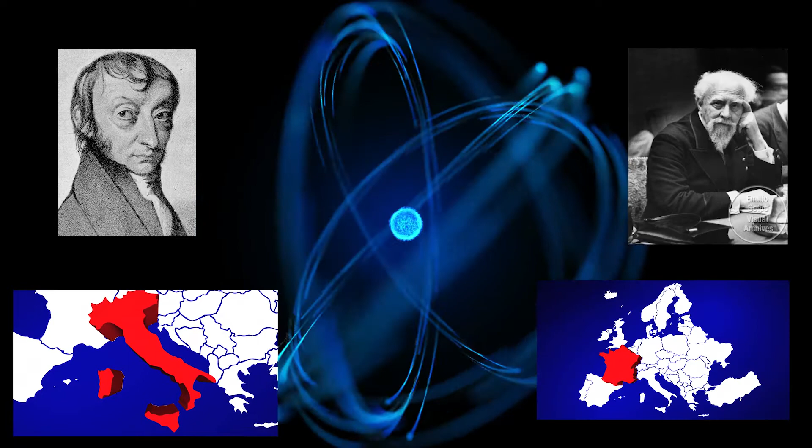According to this guy from this country, and then 100 years later, this guy from this country, in a cube of air with a dimension of 1 meter by 1 meter by 1 meter, we usually have this many air molecules near where we live.

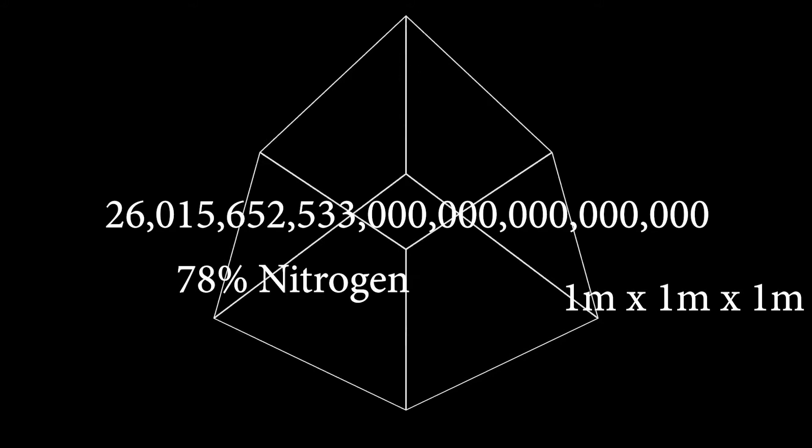78% of these are nitrogen, 21% are oxygen, and today we will follow one of those, this one. Let's give it a name, let's say Jason. And Jason is an oxygen molecule.

We don't really care about Jason's previous life as a molecule. All we need to know is Jason at the moment, and the Jason that will propel the plane later on.

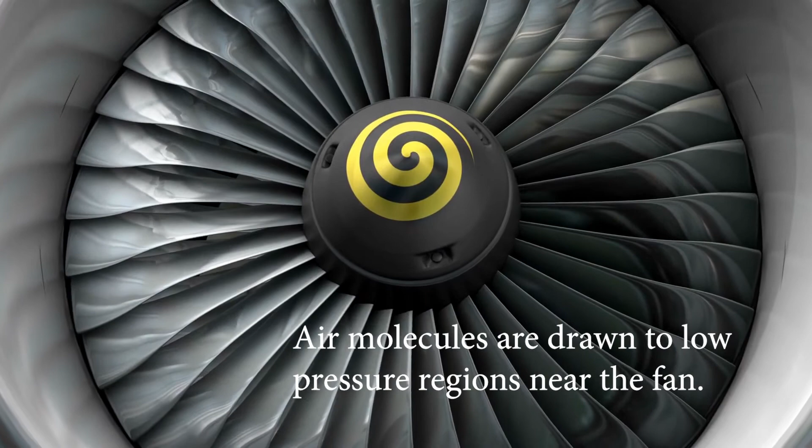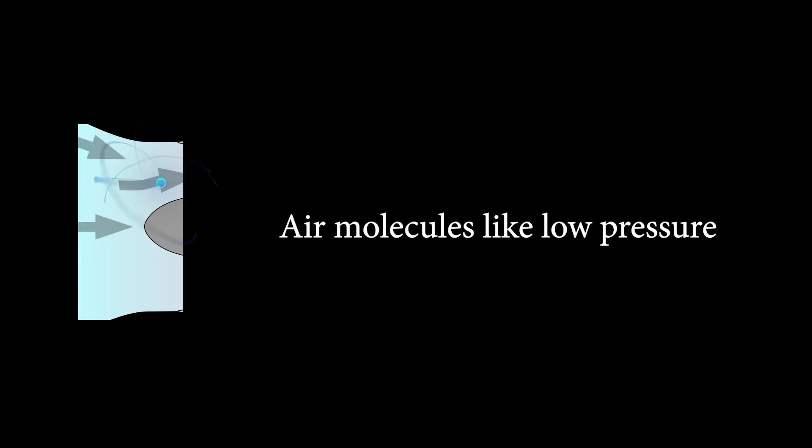The story begins and the engine's fan spins. This spin creates a pressure gradient, and Jason, the air molecule, the oxygen, is pressured to move towards the engine. So for any air molecule in the atmosphere, its tendency is always to move towards wherever the lower pressure is.

Just imagine we have two metros. One is really crowded and one is fairly quiet. Standing in a station, you have the choice to go to either, and all air molecules, including our friend Jason, will lean towards the quiet one.

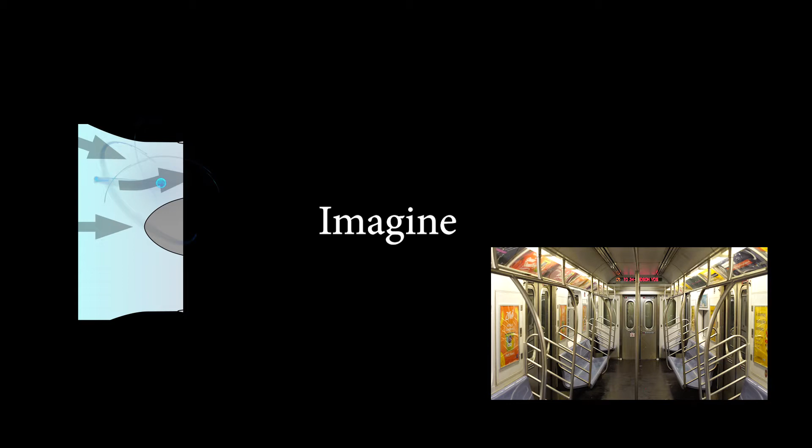And that's what Jason goes with. So Jason follows where the lowest pressure is and gets to the center of the fan. It's almost vacuum, almost no air molecules are there. There's no one like Jason, and Jason's happy because it's low pressure and there's no friends there. Jason wants to stay alone.

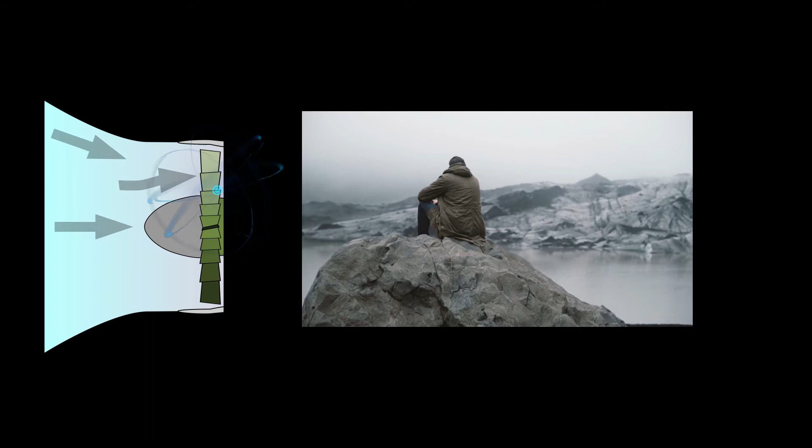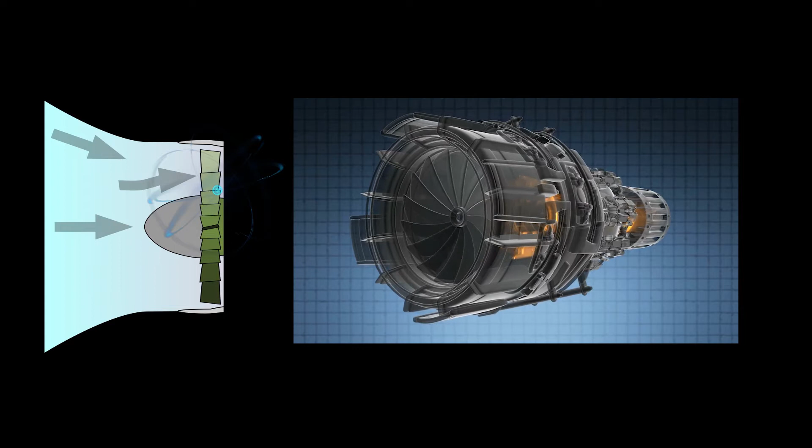But there is a vacuum formed for a reason. This is because at the center of the fan, all air molecules have been hit by the fan and exit with a higher velocity into another fan.

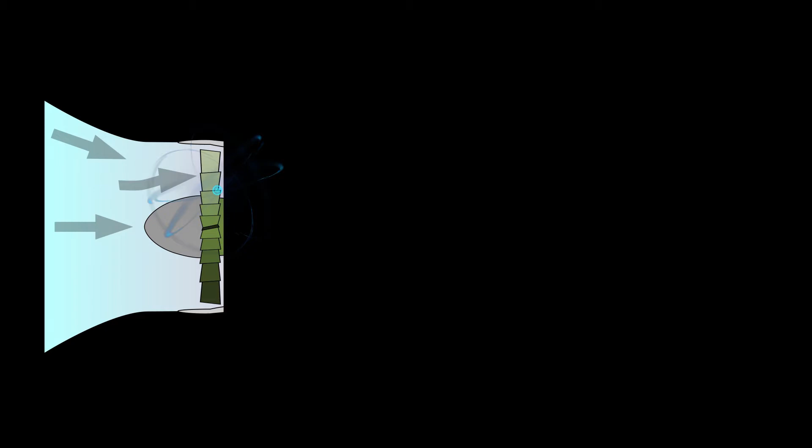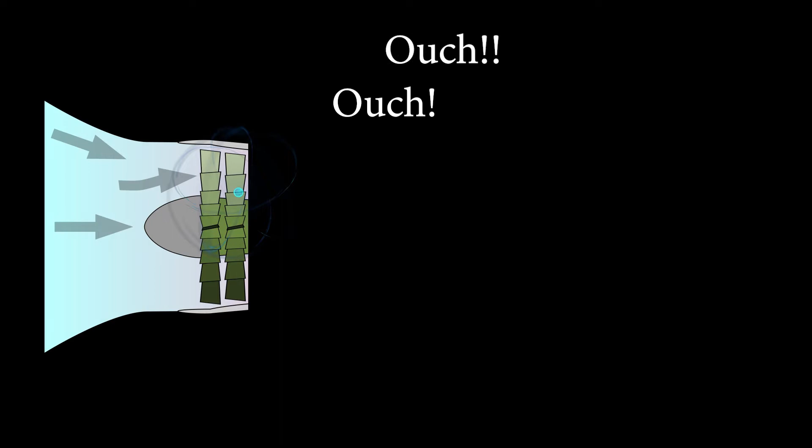And Jason, being the same as all his friends that came before him, is unsurprisingly hit by the fan. Ouch, Jason says, and runs away from the fan fast. Then Jason gets hit by another fan. Double ouch, he said, and runs away from the second fan at an even higher velocity, all the way until he gets hit typically 8 times for a normal engine in the Airbus 340.

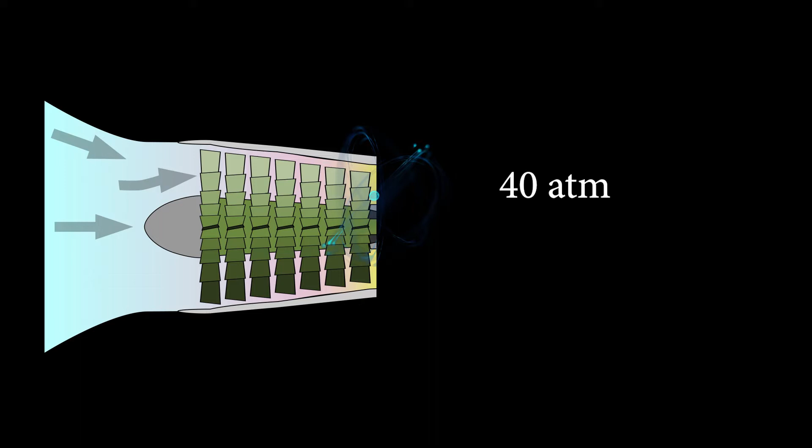Now Jason, after all the fans hitting him, is under about 40 atmospheric pressure. If the crowded metro we showed earlier was 1 atmospheric pressure, now Jason is in a metro 40 times as crowded as it was. And in front of Jason is the combustion chamber.

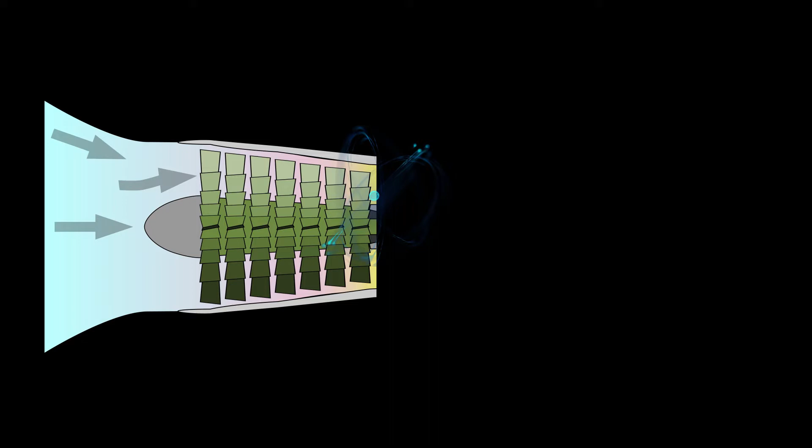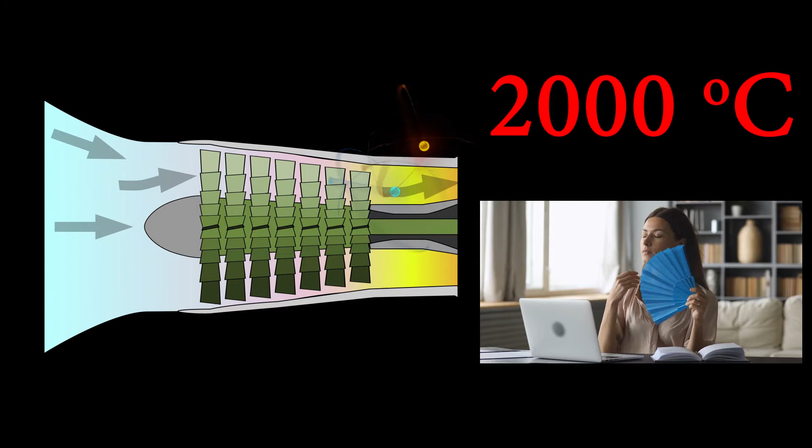This combustion chamber is about 2000 degrees Celsius. This chamber is really hot and it's also full of very hot molecules from the fuel tank. When you, Jason, the oxygen air molecule, enter this chamber, you see a really hot carbon molecule ready for some high quality mixing, and that carbon we can call her Jenny.

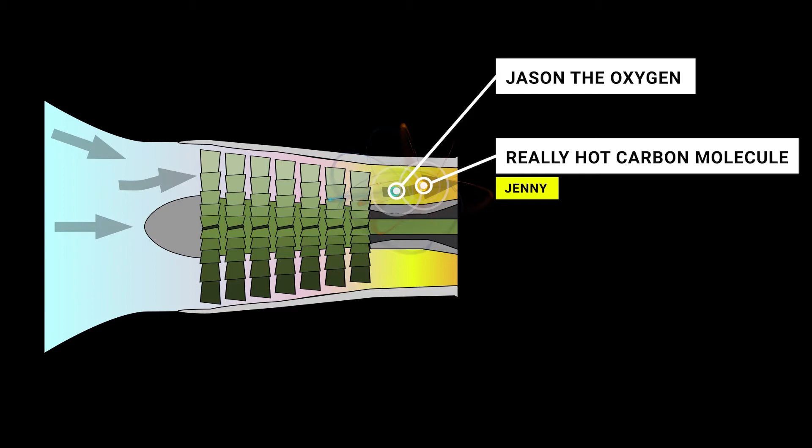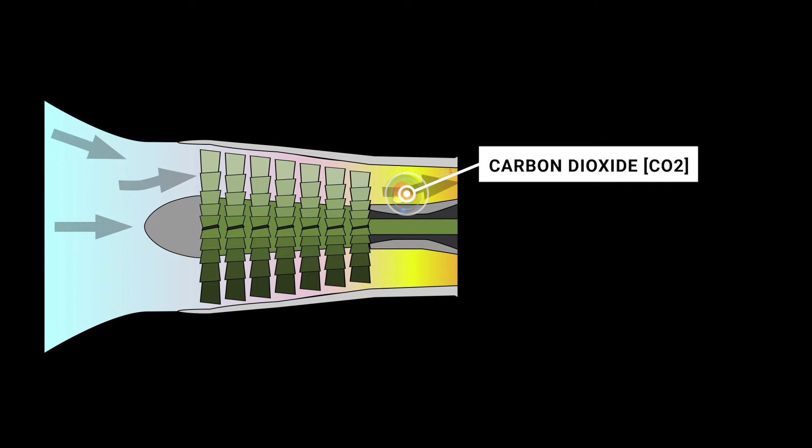After some quality time together between, say, Jenny and Jason, well, they become one, and that's how you get carbon dioxide, and now they move as one. So when they were becoming one a moment ago, they were burning hot and releasing a lot of heat.

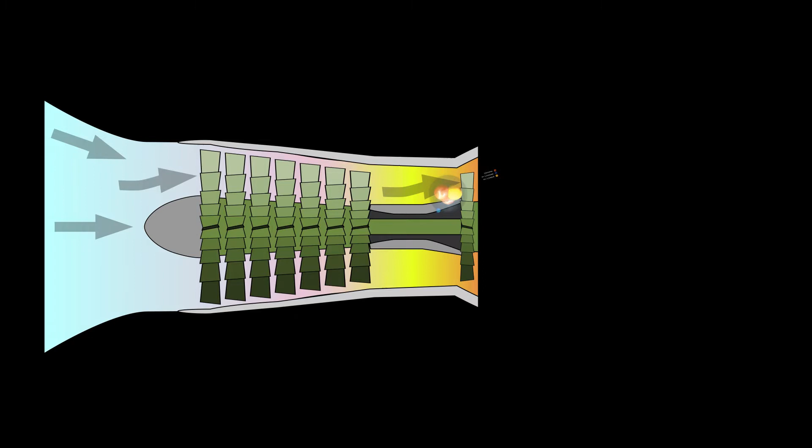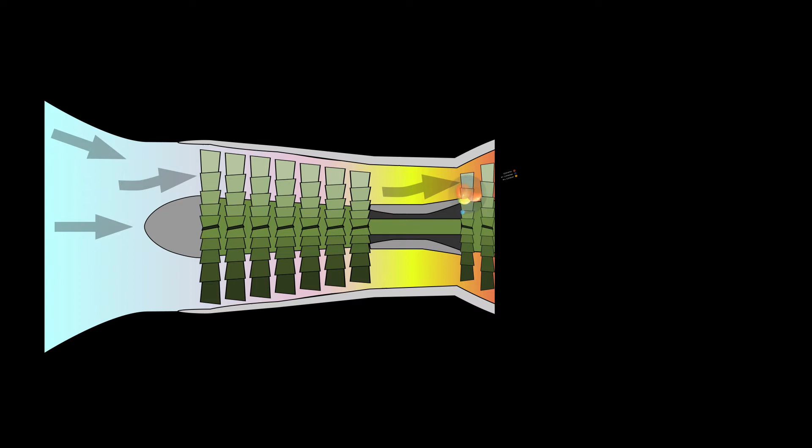He is still running away from those fans that hit him previously, but this time as Jason runs away, Jason has his revenge. He hits some fans on his way out, but only this time there's fewer fans, and the fans spin as a result of Jason hitting them.

Connected to these fans is a rigid rod. The other side of the rod is connected to the other fans that hit Jason just a moment ago. The power generated by Jason hitting these fans on his way out is now transferred through that rigid rod to the fans that hit him on his way in.

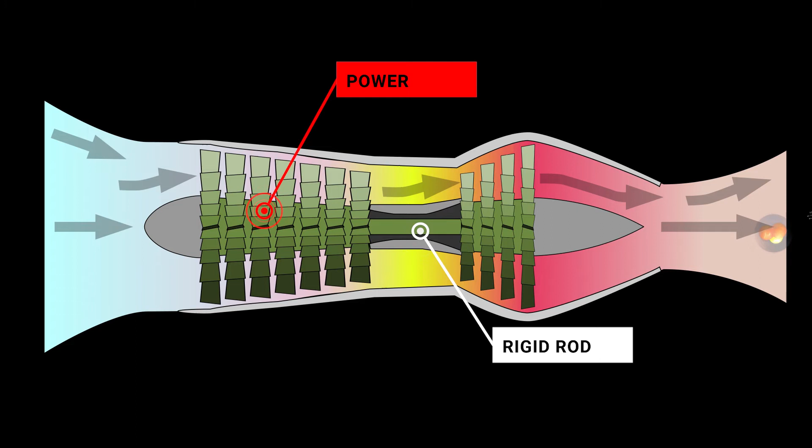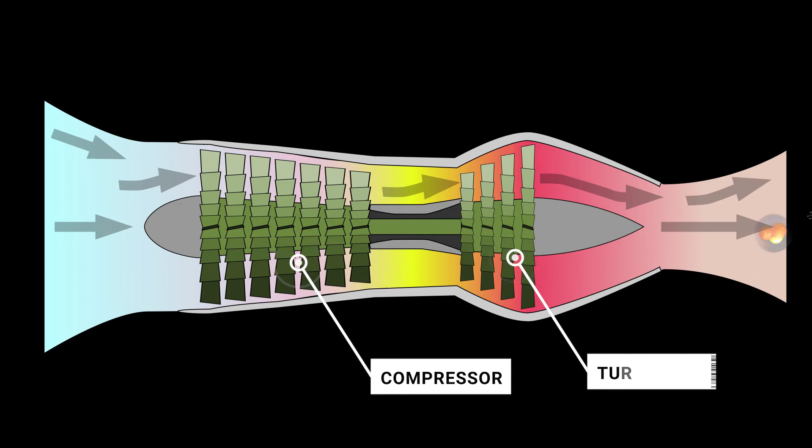The rows of fans he hit on the way in is called the compressor of the engine, and the ones on the way out is the turbine. The power from the turbine to the compressor is being used to hit other molecules on the way in.

So Jason's revenge eventually becomes the power that hits some of his other mates that are still on the way in, those who also wanted this quiet metro over the busy one.

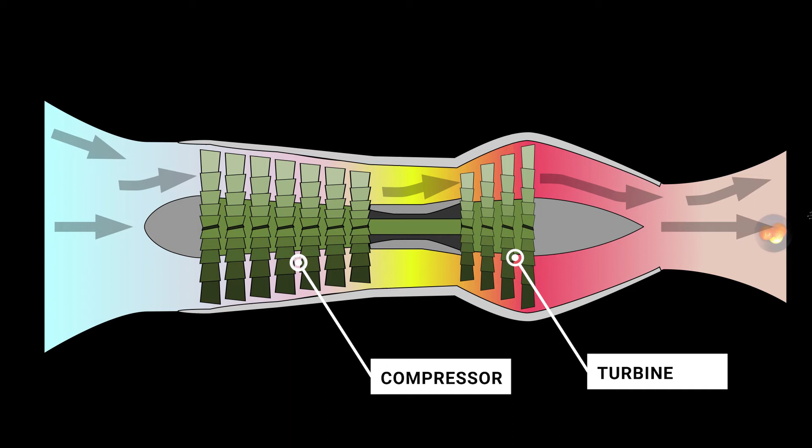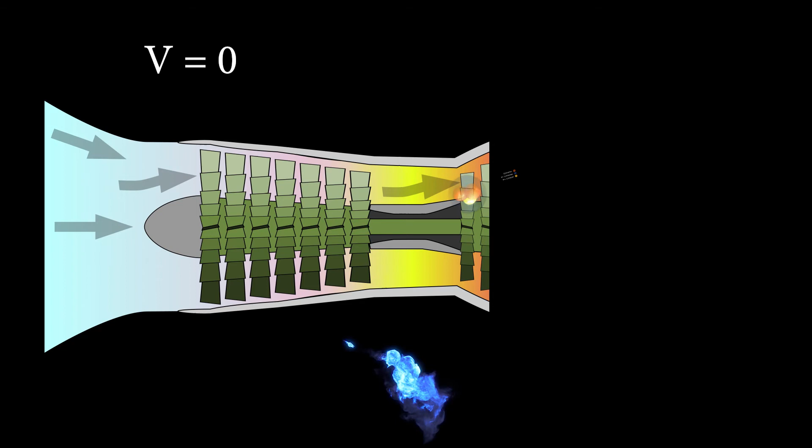So now we are at the end of the journey, and we take Jason before he met the fans and was hit by them. He had a velocity at about 0. After all the hitting, burning, mixing and other good stuff, now he has a velocity at about 2100 kilometers per hour.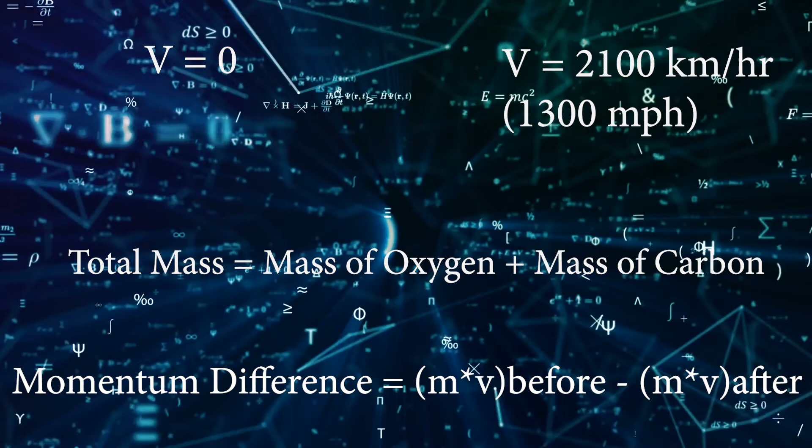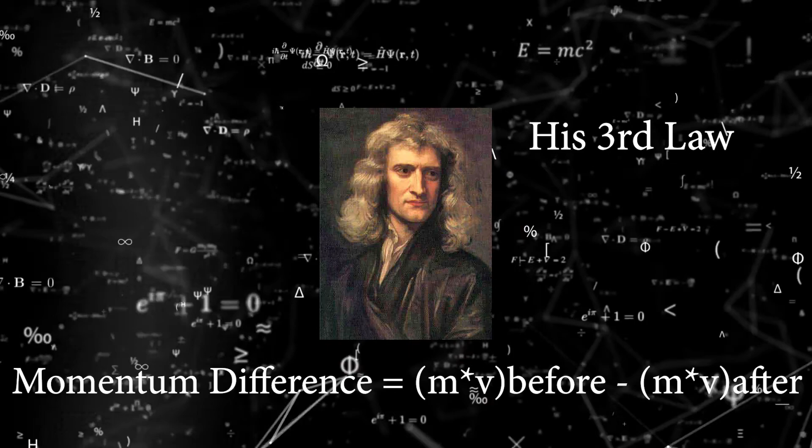But the difference in momentum is what propels the plane forwards, according to this guy's third law, which essentially says when you make something go a certain direction, that something makes you go the opposite direction.

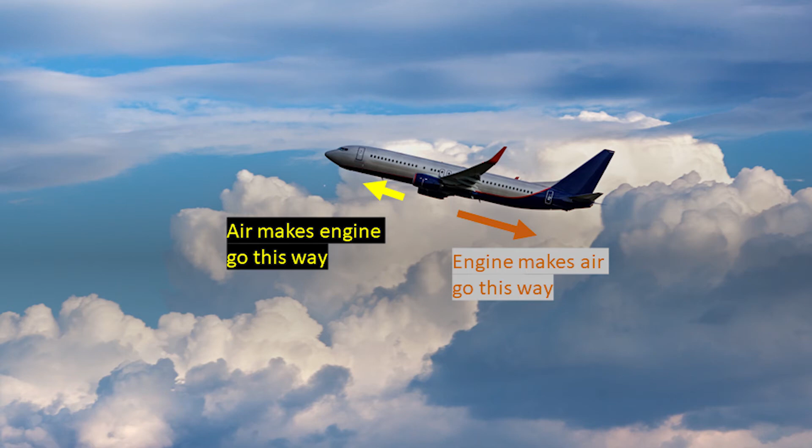And the more air you can get through the process, the more power you eventually get out of it. Just like when you're doing kayaking, the more water molecules you manage to make go in the opposite direction to where you are headed, the faster you become.

A typical engine in a plane that we normal people take can suck about 1 ton of air through the engine for every second it runs at high speed. And eventually, with enough Jasons and Jennys, the plane moves, and that is how you get to where you want.